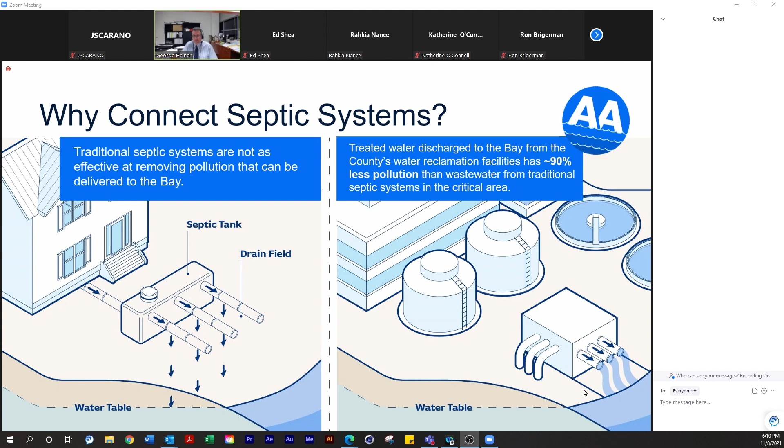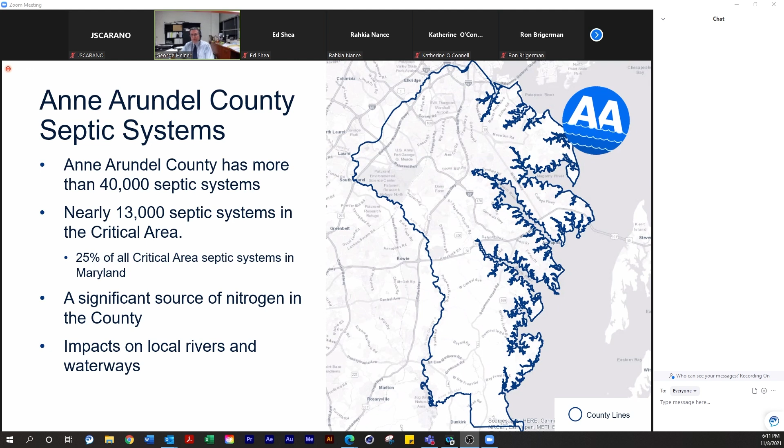So overall, we have 40,000 septic systems in Anne Arundel County. There's 13,000 in the critical area, which is areas that are within 1,000 feet of a tidal waterway. Septic systems are estimated to be a significant source of nitrogen in the county, and in addition to impacting the Chesapeake Bay, they have an impact on your local waterways. Can you go to the next slide?

So what are some of the benefits overall for septic system connections? For the broader public, there's less nitrogen discharge to the Chesapeake Bay. This is in turn going to help us maintain compliance with the state requirements for what's known as the total maximum daily load. There's also going to be fewer nutrients and other pollutants in the local waterways.

And one thing that I think not everybody realizes is that all the county waterways and watersheds are listed as impaired for nutrients and other pollutants. Can you go to the next slide? There are also some possible benefits for individual homeowners. So these are very site specific and may or may not apply to your situation.

In a lot of cases, the size of your septic tank is connected to the size of the house, and so there can be restrictions on what you could do with a building addition based on your septic system. Also, your septic system has to have drain field space, whether that's in front of your house or behind your house, and there's usually the main drain field and a spare, and that limits what you can do with some of your property.

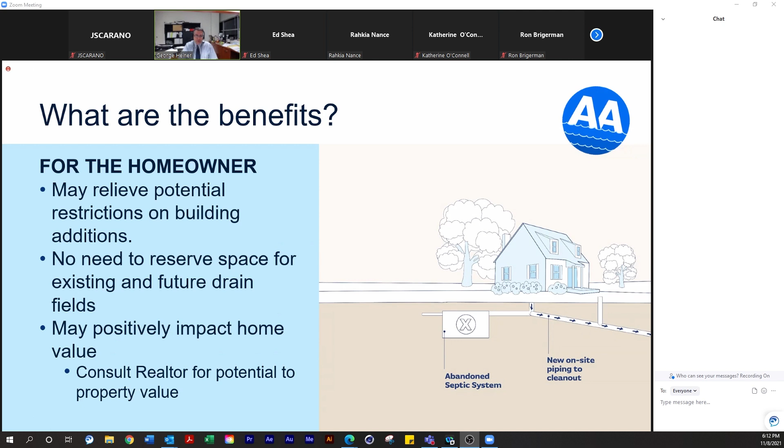There can also, in some cases, be a positive impact in home value when you're connected to the public system. Again, this is very site specific, so if that's something that is of interest to you, we would suggest that you consult a realtor about that. Could you go to the next slide?

Other benefits for the homeowner are that in some areas, if you're on a private well, and I think a lot of this community is on public water, but if you're on a private well, there's always a setback between your well system and your septic system. So connecting can eliminate that potential source of cross-contamination. As I mentioned earlier, it improves the overall local waterways.

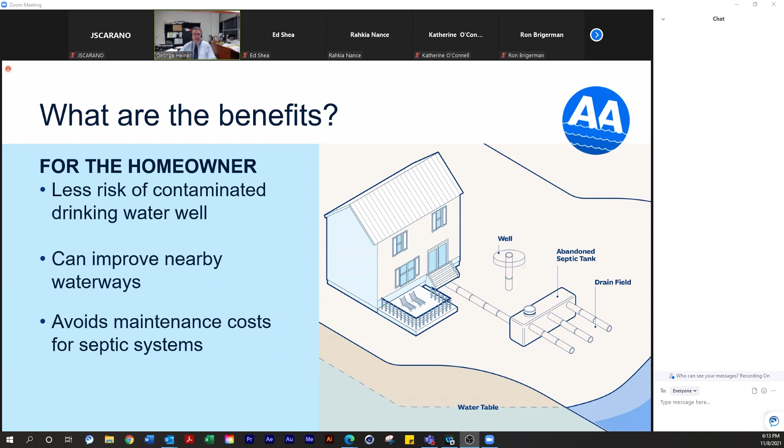And then there are some costs that you avoid as a septic system owner, and we have these on a few slides. So the main cost that you have as a septic system owner is the pump out cost, which is every couple of years. It's a few hundred dollars every couple of years. And then another potential cost is a drain field replacement. Those can be fairly costly when they're needed.

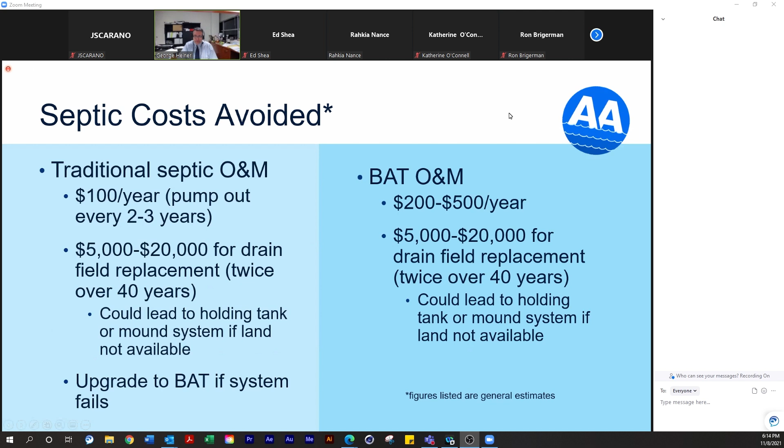Also, that's for traditional septic systems. For best available technology systems, which are also known as nitrogen reducing units, these septic systems have been designed specifically to remove nitrogen. They have a bit more mechanical and electrical components, so they cost more for operations and maintenance. And then there's also the potential drain field replacement. So there are some costs that are avoided when you make a connection. Can you go to the next slide? So we have an overall need to try to protect our waterways and improve water quality.

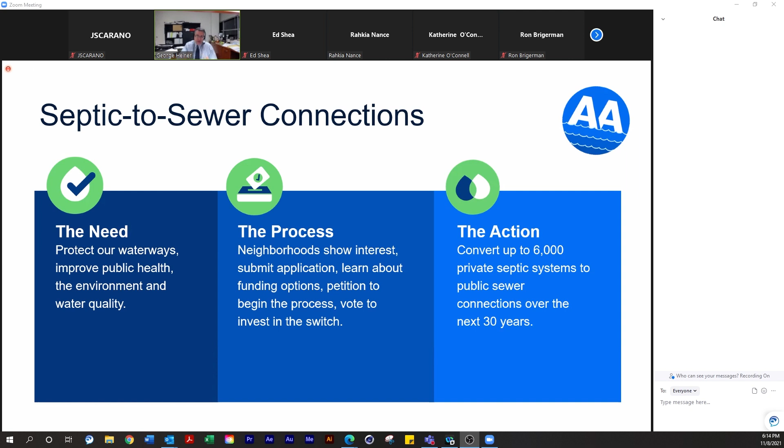We've developed this process, which we're going to be talking about in more detail tonight, which is an extension of the petition process. And our goal with this program is to try to connect up to 6,000 septic systems over the next 30 years. So that's 6,000 out of the 40,000 throughout the county. Can we go to the next slide?

So just a little bit of background on the septic to sewer connection program. We started many years ago with initial concept level planning. This was done in response to, at the time, what was called the Phase 2 Watershed Implementation Plan for the Chesapeake Bay. And that was really looking at significant nitrogen reduction loads in Anne Arundel County within the septic system sector, looking at lowering loads by almost 50%.

We did a lot of planning at that time, sort of oriented around the idea that we might have to hook up 20,000 septic systems. And so some of the layout information we'll talk a little bit about tonight was developed at that time. We then initiated a septic task force. This was a collection of private citizens representing the business community, environmental community, and some actual community groups. They helped us develop input on policies, prioritization criteria, and outreach suggestions.

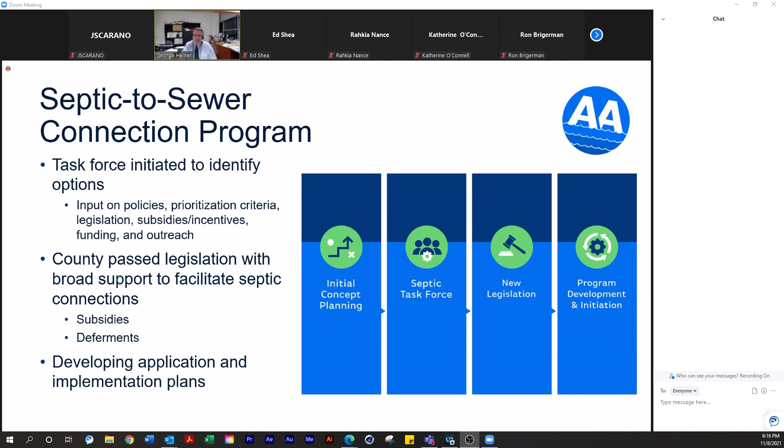And their contributions also led to legislation that was passed at the end of last year and early this year that we're going to be talking about in more detail tonight. The key ones are DPW is allowed to offer subsidies to projects in certain areas, and there can also be partial deferments of the annual assessment. We're going to talk in a lot more detail about those. And along with those legislative changes, we've developed a program to help us evaluate and compare different communities, since we wouldn't be able to offer subsidy to all possible locations at the same time. So let's go to the next slide.

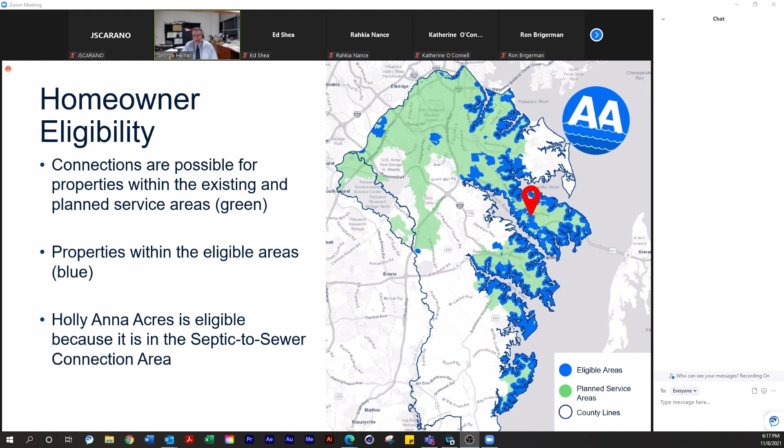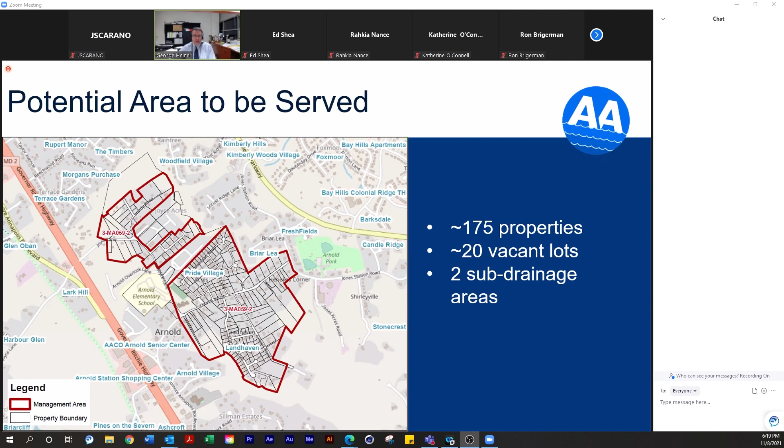There are a few vacant lots in the area, and as we'll get into in more detail, vacant lots are not eligible for the subsidies and deferments that are being talked about. And with that, I'm going to pause for questions.

I apologize for the audio problem at the beginning.

The next section we're going to talk about is funding and how the program costs are determined and how the assessments work. Okay, so I'm going to hand it off to Ed. You already met Ed. He's with HDR. He was gracious enough to step in for me for a little while. So go ahead, Ed. Thanks, George.

And then finally, the CFCC, or the Capital Facility Connection Charge, represents the county's investment in the wastewater reclamation facility capacity to treat your wastewater. And that's a fixed charge that's currently about $9,000, paid at the beginning when the sewer is connected.

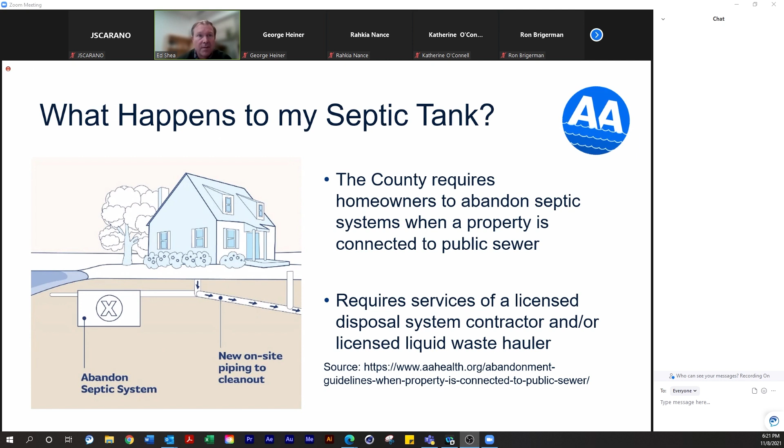So typical costs for the public part of this, the public sewer constructed in the street, per household or per EDU, equivalent dwelling unit. Holly Anna tends to fall in the middle of what we're projecting for communities where septic to sewer is potentially going to be constructed, $50,000 to $60,000.

And this relates to average property size, so the distance between homes that would extend the sewer, the proximity to the existing infrastructure that this would connect to, the depth of the sewer, whether we have grinder pumps, and we'll talk about that in further detail, how many pump stations we would have, any surface restoration. So if it's being constructed in the street, typically you would pave over the trench where the sewer is installed. And all that factors into the public cost.

This is a project for the county. The project is managed and paid for by the county, and then the county recoups the cost through an annual assessment to the homeowners.

So this next slide summarizes the private on-site costs that the county has seen historically. There have been homeowners who have connected. Usually that's been for homeowners who have a public sewer already in front of their house. And these costs have ranged typically between $2,000 to $8,000, sometimes up to $10,000. And again, that relates to property sizes.

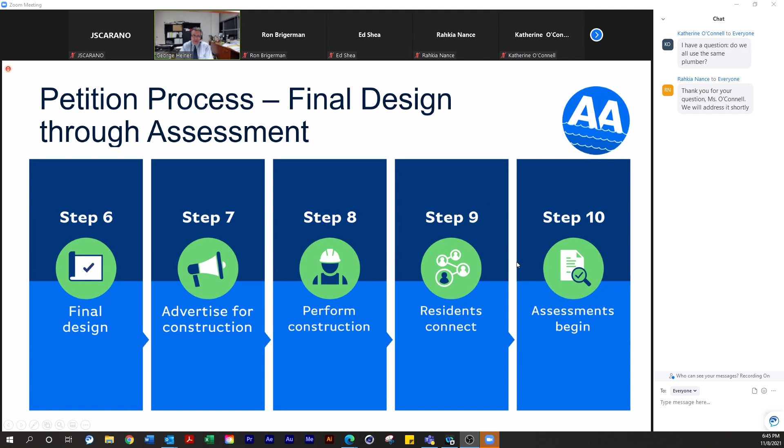So do we have any questions on the petition process at all? I don't know if this area has petitioned for water. I know there's some public water through the area, but I don't know if that was a result of a petition. Okay, if we don't have any questions, then let's go to the next section, which is... There is one question. Okay. Resident asked, did a neighbor ask for this?

Well, my understanding is we did get some interest from people in this area through the ourwater.org website. And so what we've been doing when we have some interest in some areas is coming out and talking to people about the program changes, so that they can understand how the petition process works and get some idea of what the costs might be. Okay. So let's move on to the next slide.